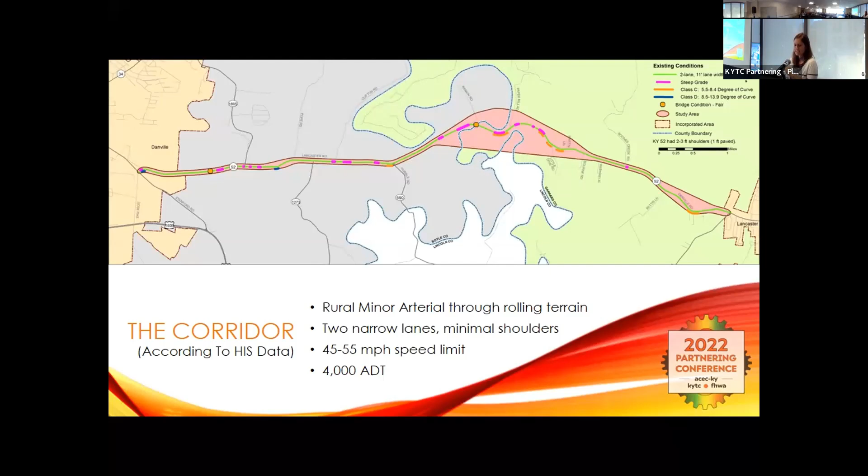Okay, so just to hit the corridor highlights, it was a rural minor arterial, like Casey mentioned, between Danville over to Lancaster. It's got narrow lanes, tiny shoulders, 45, 55 mile an hour speed limit, about 4,000 ADT. You can see some pictures here of the corridor itself, getting a feel for the typical section, the steep side slopes, some of the pavement edge drop-off concerns. And it's one of those rural roller coasters where sometimes you can see and sometimes you can't.

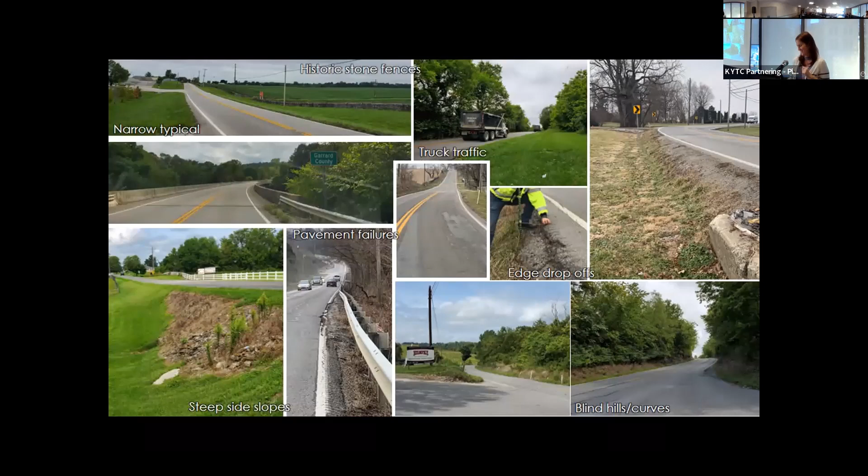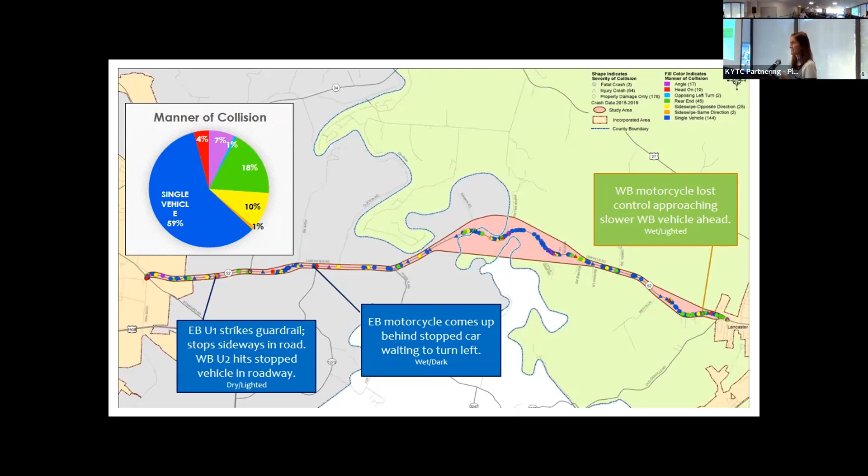There were 245 crashes over a 5-year analysis period, including 3 fatalities, which you can see called out with the call-out boxes. About 60% of those were single vehicle collisions, and I think 60% as well were RD crashes, roadway departure, which tend to be more severe. So it was definitely a worthwhile corridor to take a look at and try and get that HSIP perspective blended in. And Theresa is going to talk about how we approach the data.

Okay. All right, so let's take a closer look at our corridor. The way we approach this from an HSIP perspective, with our HSIP hat, we used what we've been told is a new software for the HSIP process, which is called TopoDot. It's a point cloud processing software. So we drove the corridor with mobile LiDAR, and then this software allowed us to extract features such as edge of pavement, center line, and use that information to get more detailed information.

So some of the benefits was we could measure a lot of this stuff from the safety of a desk chair. We didn't have to be out there on this corridor with, as you can see, some very high truck traffic and wide loads, measuring things. It was a lot safer to do it from our desk. We could get, like Casey said with the data issue, a larger quantity of data, more accurate data. Point clouds are very accurate.

Some of the drawbacks, though, is I didn't get much exercise. I did a lot of the analysis from my desk chair, which, like I said, is great. It's safe, but I didn't burn as many calories.

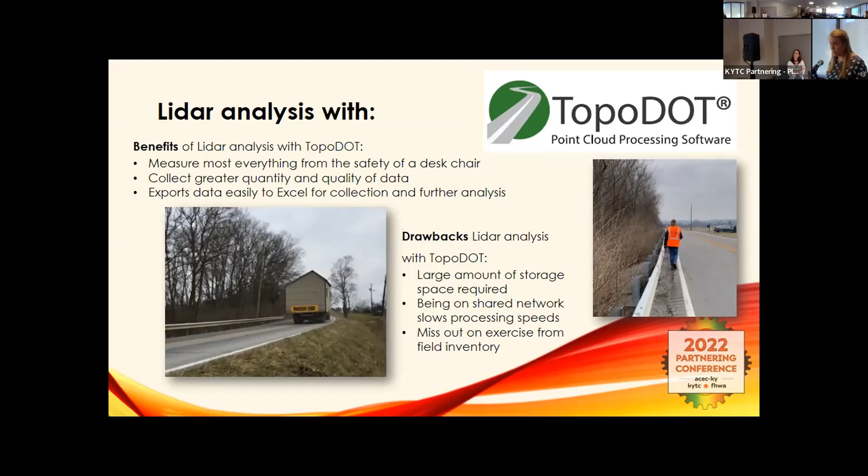Some of the other drawbacks is a lot of network processing was required for this. So when you're working on a shared drive with big data, that can be a slow process. But overall, we thought it was a great tool for analyzing this corridor's physical features. So a little bit more about how the program works. Like I said, first step is extraction of features. Get your edge lines, your center lines, your ditch flow lines, guardrail, almost put them in like you would get in a traditional survey.

But then the real value comes in step 2, the analysis. And that's where the program really helped us. It had certain tools that could give you curve advisory speeds. You could measure the lane and shoulder widths at any increment you wanted. You could do it every 5 feet if you wanted. You're definitely not going to be able to do that out in the field. You can get pavement widths and drop-offs. You can get a slope because you have an elevation with your lines, so now you can get a slope between those 2 lines, on any increment you want.

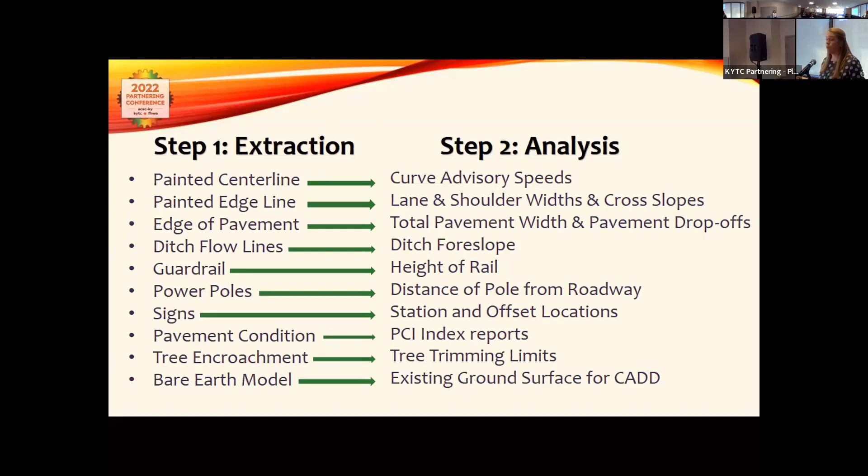You could easily extract locations of utility poles and then sort them quickly by distance from roadway, so you can narrow in on which poles are closest and within your clear zone. Some other cool tools was pavement condition. It actually had a tool to do PCI index reports on pavement. Other things, tree trimming, and we could even create a rudimentary surface for analysis and design later on.

So just to give you an example of what some of these things look like, here I've got curve advisory speeds where, by station, it told you what the computed speed was. Now this is kind of a black box for us. So we used this more as a tool to narrow down what curves we needed to take a closer look at. That was really what it's helpful for.

The graph on the bottom, which you probably can't see very well in the back of the room, is pavement width by station. And so this is a lot of points, a lot of data, but what you can see from this is generally between 22 and 24 feet is what we have for pavement width. Of course, there's outliers. There's places where we're narrower, places where we're wider, but in general, we can say with confidence that we're between 22 and 24 feet, which is sometimes hard to do on these HSIP projects where it's like, well, how wide is it?

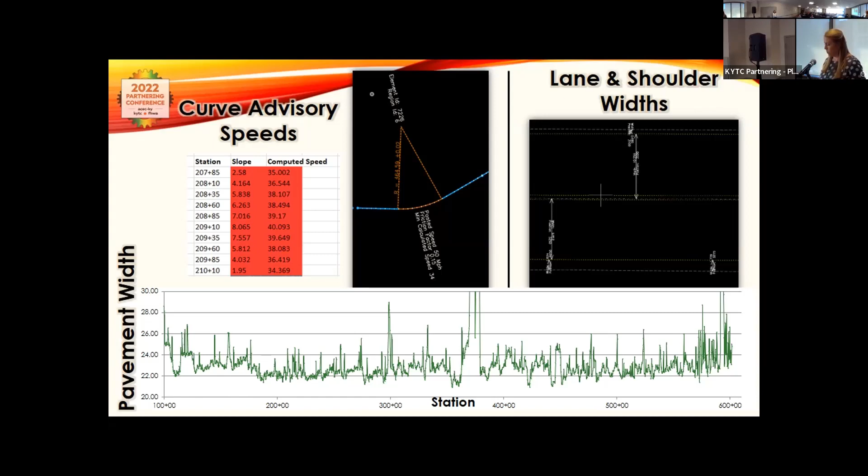Well, you know, it varies, but this graph really gave us a good representation of the corridor as a whole. Another example, like I said before, side slopes. We could sort where do we have those steep drop-offs? Where do we need to maybe look at doing some roadside regrading? Another extraction we could do was pavement edge drop-offs, you know, where you get that lip where if your wheel hits it and you try and auto-correct, you can lose control quite easily.

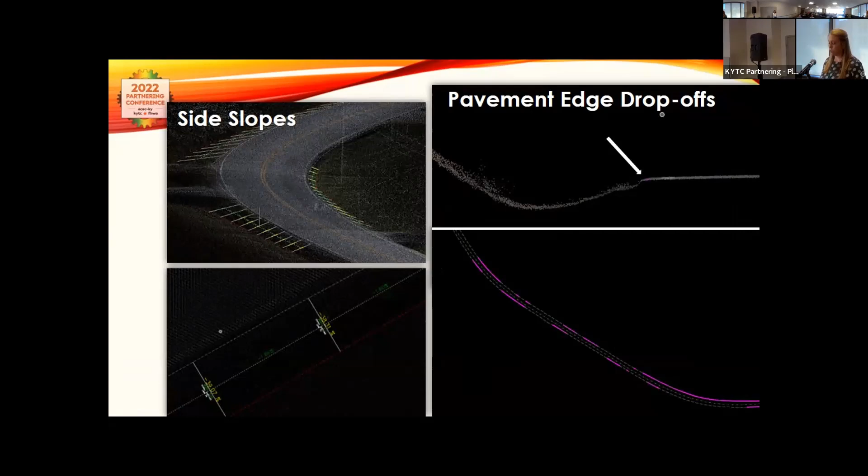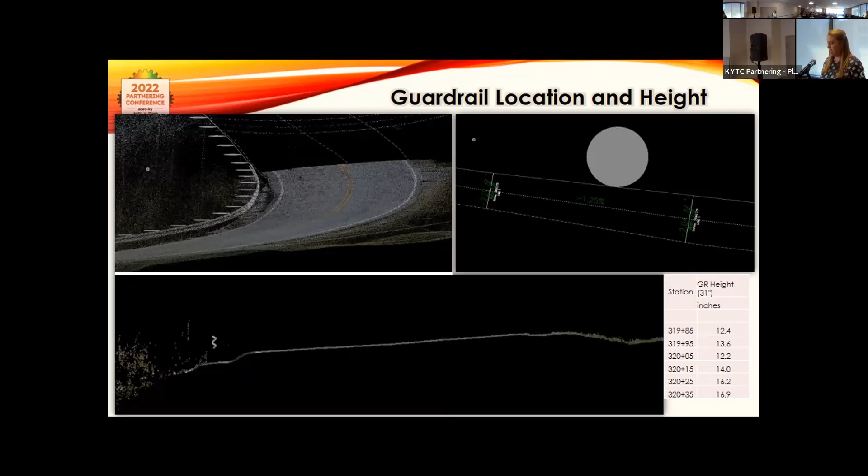Guardrail. So once we extracted the guardrail, we were able to tell the height of the guardrail, the offset of the guardrail from the edge of the pavement. That was useful. Utility poles. We were able to place a cell where all the poles were and quickly sort them, like I said, by station and offset from your center line, so you can quickly see which ones are closest. Signs, you can get those through sign inventory LiDAR and through TopoDot.

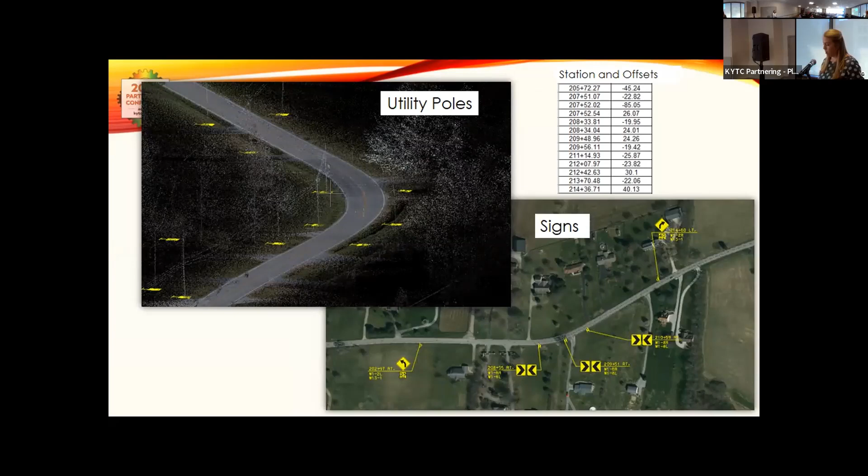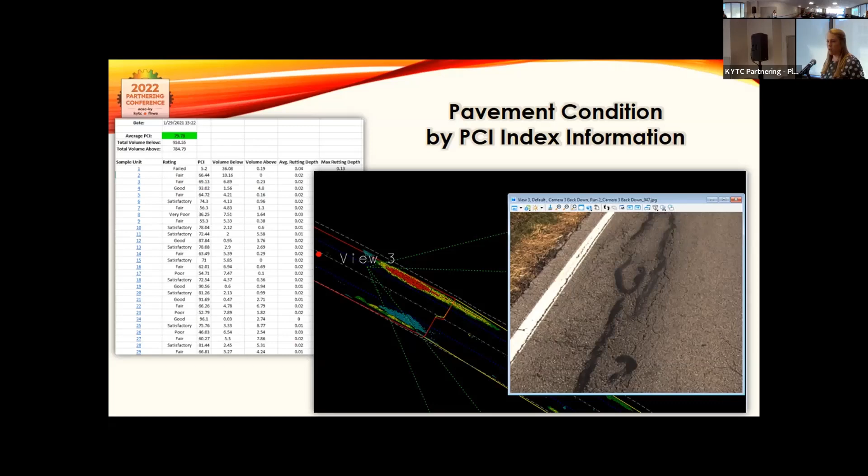This is the other one, pavement condition. Another one that we kind of use is just kind of an indicator of where we needed to start looking for rutting and other pavement failures. And last, or second to last, the tree trimming. So we could kind of designate an envelope and run it through the corridor, and it would turn all the points in the LiDAR red, and then also delineate them in plan. So you knew exactly where your limits of tree trimming would need to be for your specified envelope.

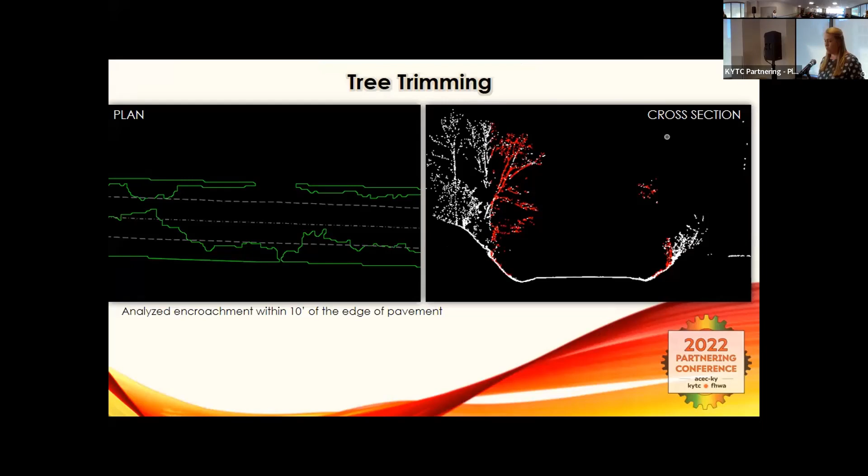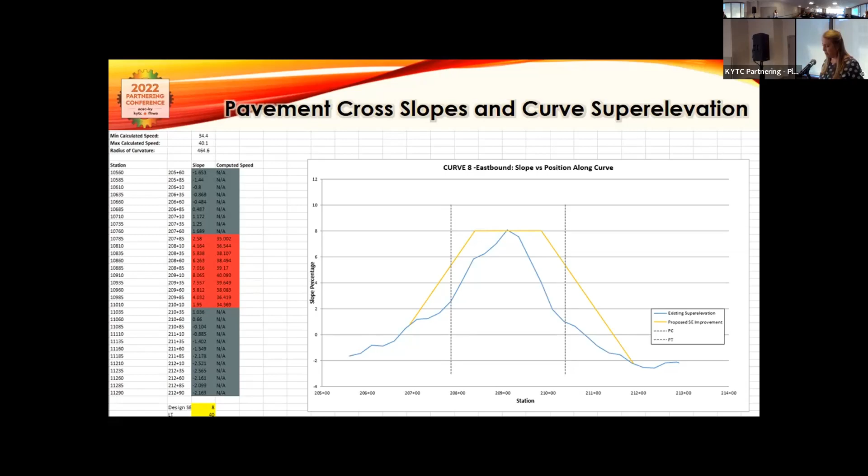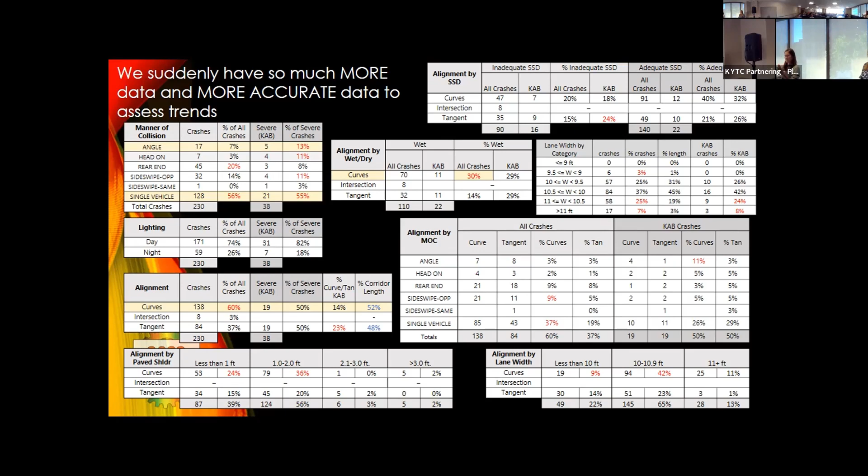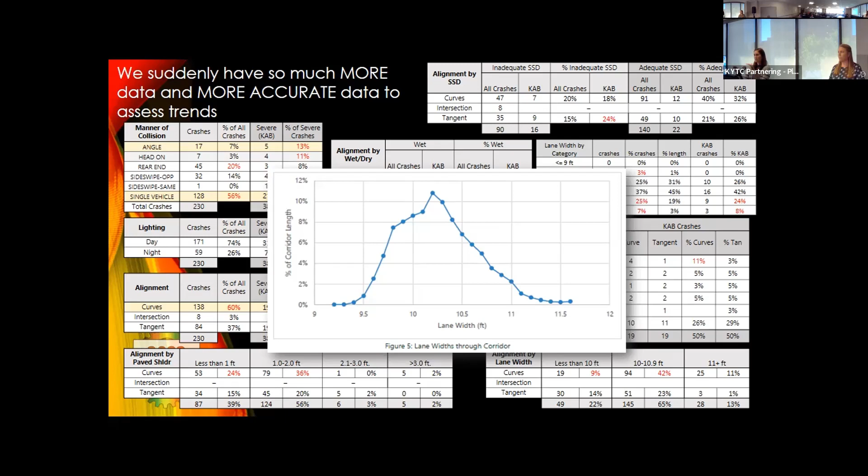But so, like I said, that's a lot of data, and I'll let Rebecca talk more about the analyzation. So definitely coming at it from the traditional planning experience, right, where we're blending in HIS data that says you have 11-foot lanes and 1-foot paved shoulders. Now we suddenly have so much more data to work with the TopoDot and with the LiDAR information that Theresa was talking about. And not only do we have more data, we have more accurate data. Just one quick example, HIS says you have 11-foot lanes. After we ran the extractor TopoDot tool, you can see we got about 6% of the corridor maybe that has 11-foot lanes. We're a lot closer to just over 10. And then multiply that by every single feature that Theresa just talked about, right? So we had a ton more to look at.

Just taking, for example, the curve data, she mentioned that we were able to get a lot more information about individual curves that you can see summarized in the table at the bottom of the screen. We could calculate exposure, knowing that 52% of the corridor landed inside a designated curve, whereas we saw 60% of the crashes in those segments, which really told us, you know, you should probably focus in on that. And we were able to slice it down and look at curves by radius and where those trends are popping up. That table at the bottom kind of shows you that we saw the highest concentration of crashes in curves for those tighter radius curves, less than 600 feet.

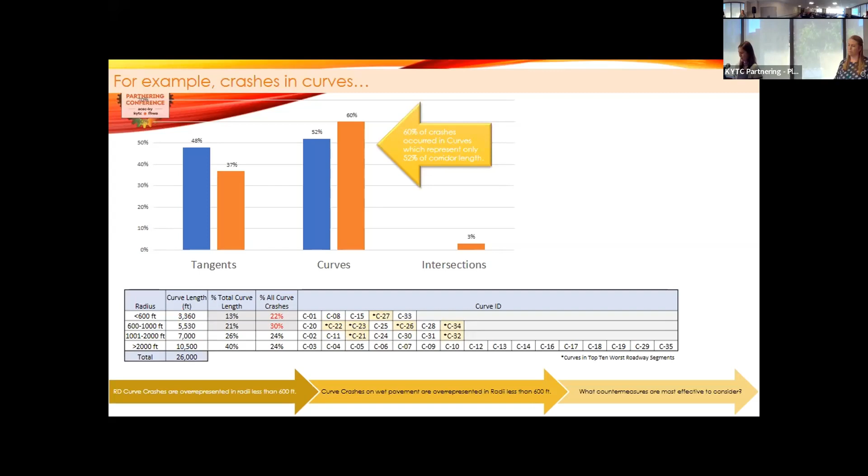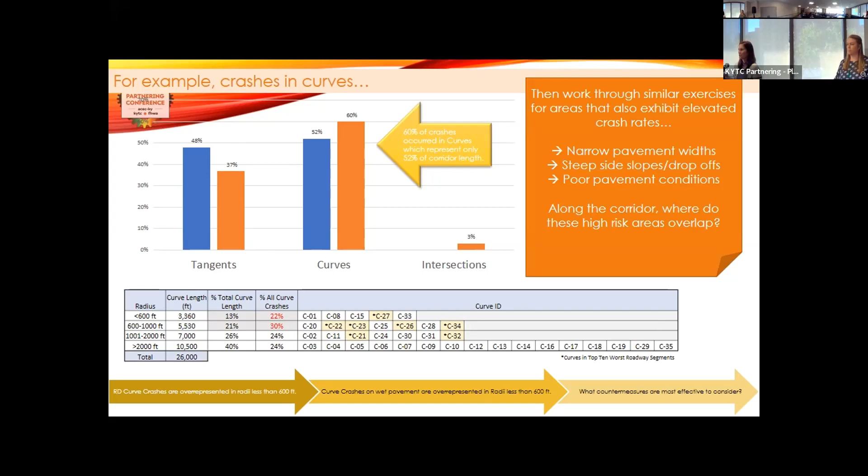We were also able to kind of zoom in and say that curve crashes on wet pavement were overrepresented, and really focus in on which countermeasures are most effective for the situations that we're seeing overrepresented. And then multiply that by looking at pavement widths, by looking at those side slopes, by looking at the pavement condition that she was talking about, really digging in and getting to that data-driven elements of the analysis.

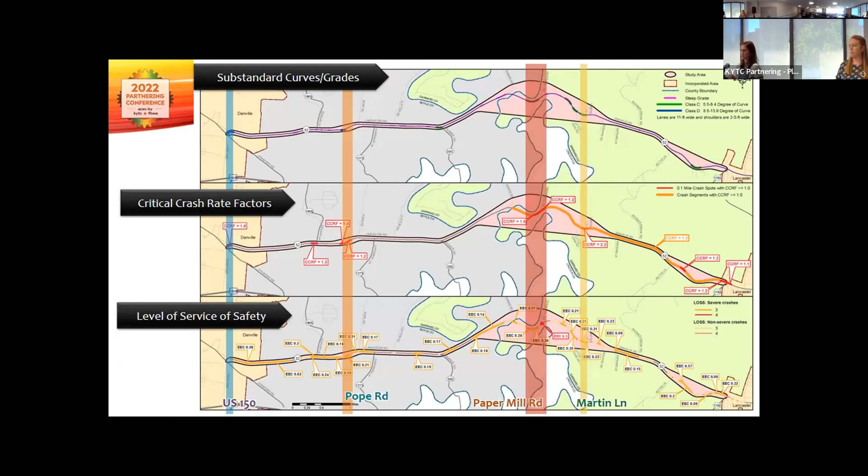One of the other key things that kind of the planning process dragged over for the HSIP team to look at was really having those conversations with local officials on the ground. We've obviously got the data to know where the substandard curves are, to know where the grades don't give you adequate sight distance, to know where the statistical analysis says we've got a high critical rate factor or poor level of service of safety, and can overlay those and kind of get some target areas that we want to look at from a planning perspective.

But then because it was a planning project, we were also able to reach out and engage with those local decision makers, with the mayor, with the maintenance guys, with the public through a community survey to really understand, for the people driving the route, for the people pulling the wrecks out of the ditch lines, what they're seeing, where the crashes are happening, as well as where the near misses are happening, to really get that on-the-ground feel for what's going on.

Definitely the data was pointing us more to focus in on the Garrard County side of the route because it just had so many substandard curves and crashes. But if you'll notice the pink dots on the map, a lot more of our comments came from the Boyle County section, which we would not have necessarily zeroed in on just looking at the crash data.

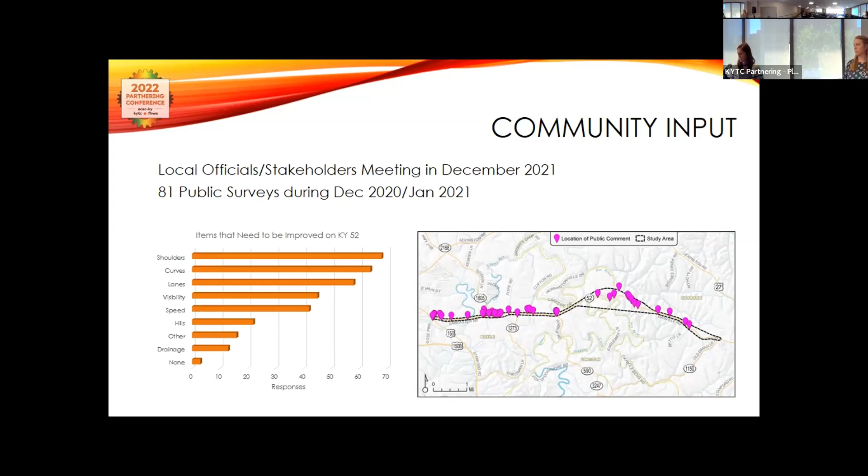So kind of the third approach is that since we work on this from two different directions, two different approaches, we were really able to look at a wider selection of improvements than what would be considered in just an HSIP study or just a planning study, so that nobody gets left behind or forgotten, right? And Theresa's going to talk about that.

So first, to talk about some of the things that we would consider with an HSIP project to improve safety on this corridor. Like Rebecca said, we have a bunch of data, we had a bunch of ways to slice and dice it and look at it, but at the end of the day, there's always a budget, right? So we have different concepts to consider. They all have a cost associated with them. And then there's also a return on investment associated with them.

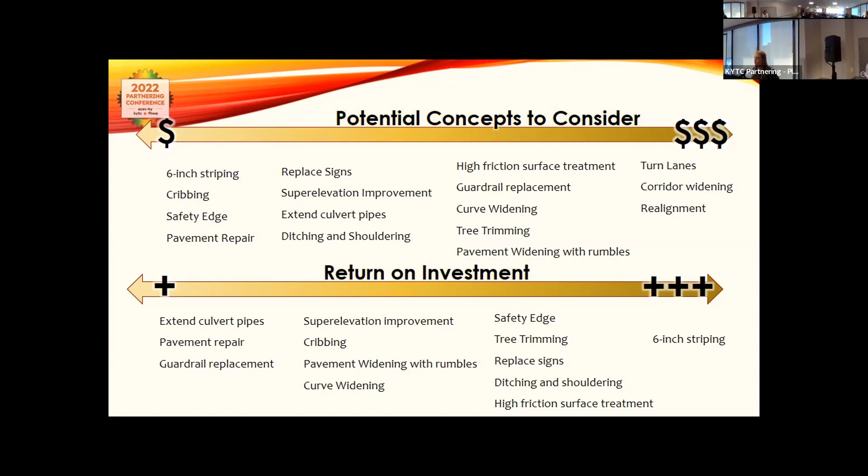And that's where I think we had a lot of collaboration with our planning folks, and they really helped us with that as well. But ultimately, you also have to mix in a little bit of engineering judgment. And eventually, we arrived at the HSIP countermeasures that we would be advancing.

Some of them were corridor wide, where we just saw that there's just so many steep drop-offs on this corridor that we should do roadside regrading everywhere. Guardrail, same thing. Permanent paint, 6-inch paint and striping. I mean, that's just easy. ROI on that's so high, we got to do that everywhere.

However, there were some other improvements that maybe didn't make sense to do everywhere, and we really needed to focus in on those areas that we identified through our earlier analysis, that we would get the most bang for our buck if we did it in just those targeted areas. One of those in particular is the pavement widening. We got a lot of benefit out of rumble strips. However, we couldn't put rumble strips down unless we had enough pavement width.

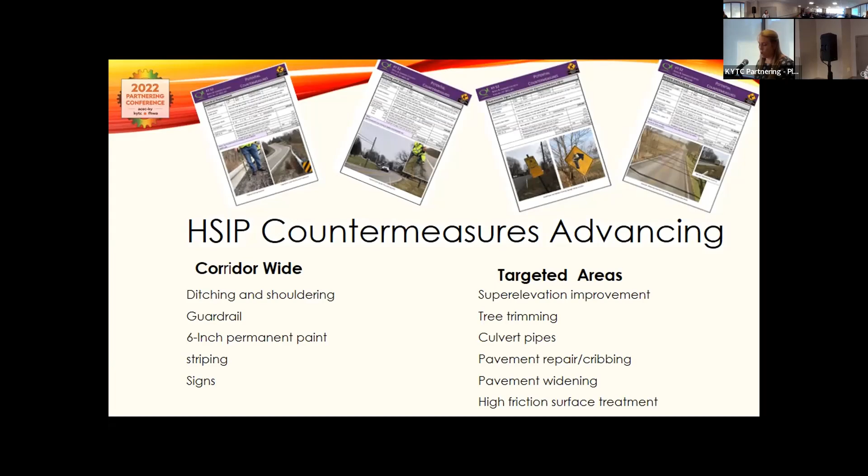So, okay, well, we can't afford to widen the entire corridor. So let's just do it in the area that Rebecca alluded to earlier in Garrard County, that has a lot of relief with the terrain and very bad sight distance. And that's where we should really focus our efforts, target our funds. So that's kind of how we went about it on the HSIP side.

So then on the planning side, we kind of picked up where HSIP ran out of money, right? And we can look at the big picture stuff, actually realigning the roadway, never mind the giant gas pipelines that are going to cost $1 bazillion. We can look at full scale corridor widening, getting it out to that 25, 26 feet where you can actually put the edge line and center line rumble strips on it, as well as individual intersection improvements. You can see labeled on the map there, B through G.

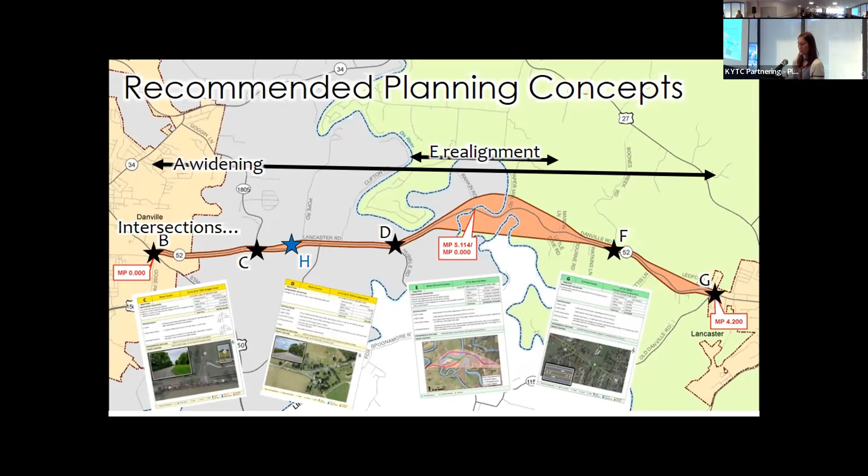We did end up picking up one of the HSIP options there. Spot H is a set of S-curves near Pope Road, where we heard from the local officials, we get a lot of people running off the road here. This is the tree they always hit. This is the guy, he knows what to do. It's cool. But because we had a little bit more budget to work with, we were able to pick up those that fell through the cracks to make sure that those good, valuable improvements are still picked up on the planning side.

So this map kind of highlights how those two overlap, with the stars being the planning intersection improvements, and then the colors that are really hard to see at this scale. I apologize for this beautiful sunny room, covering some of the HSIP stuff. So on the HSIP side alone, we were at about $2.1 million. If you fold in the short-term planning improvements on top of that, we were right at 2.7. And then if you fold in the long-term, eventual, maybe someday stuff, it adds up really quickly to somewhere over 30 million.

All right, so some lessons learned is HSIP puts the data in the data-driven process. Like I said, we have so much data and you can get lost in it pretty quickly. But like I said, at the end of the day, there's only so much you can do. Funds are limited, and you really need to narrow in on what your end goal and focus is, and that was improving safety.

So one of our other lessons learned was the benefit of actually talking to a larger group of stakeholders than you would engage with on a traditional data-driven HSIP project. Sometimes you get really good insights, and sometimes you get really good stories, but it was still a valuable exercise to work through. And Casey's going to wrap us up.